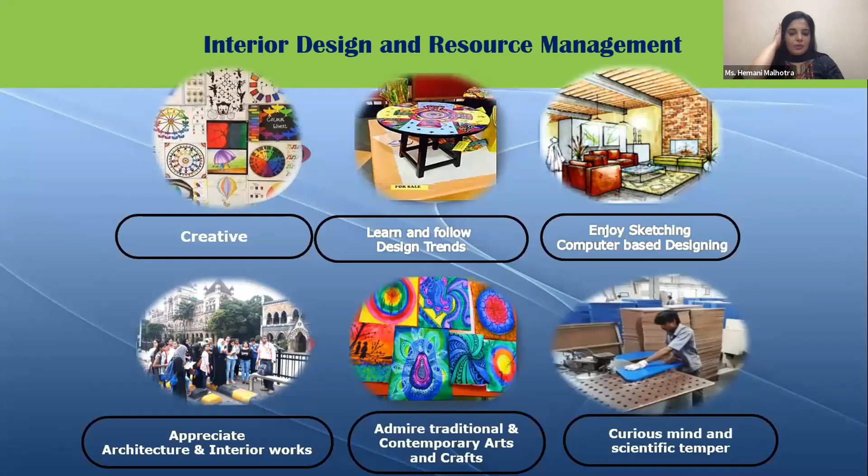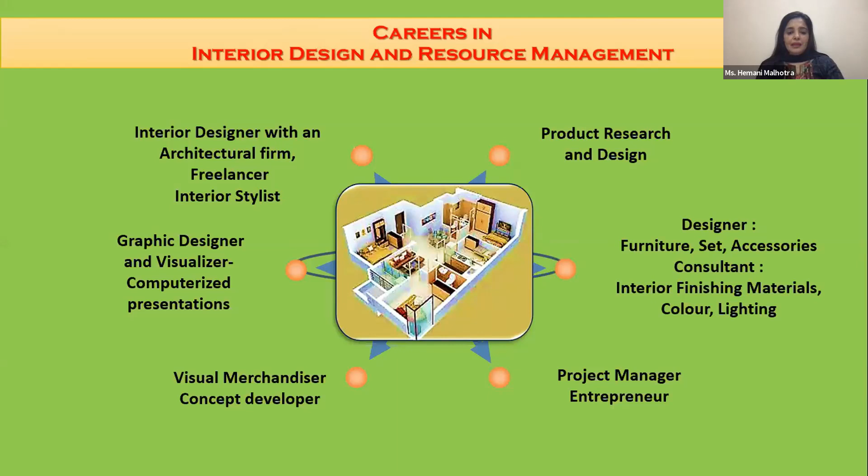The students of Interior Design and Resource Management learn to design a wide range of spaces and can explore a number of career paths, including freelancing and styling, set designing, accessory consultation, project manager, retail designing, graphic designing, and visual merchandising. The program has a dynamic approach as it drives the students to research and reinvent through varied perspectives to perform better. The annual exhibition Nirmiti is a popular event which showcases the creative work of our students.

The students have demonstrated skills for sustainability practices by converting some of the discarded pieces of furniture and material from college and other places into concept based products. The COVID 19 crisis demonstrates that we need global solutions to global challenges, and colleges and universities all around the globe have taken a step forward and have started collaborating.

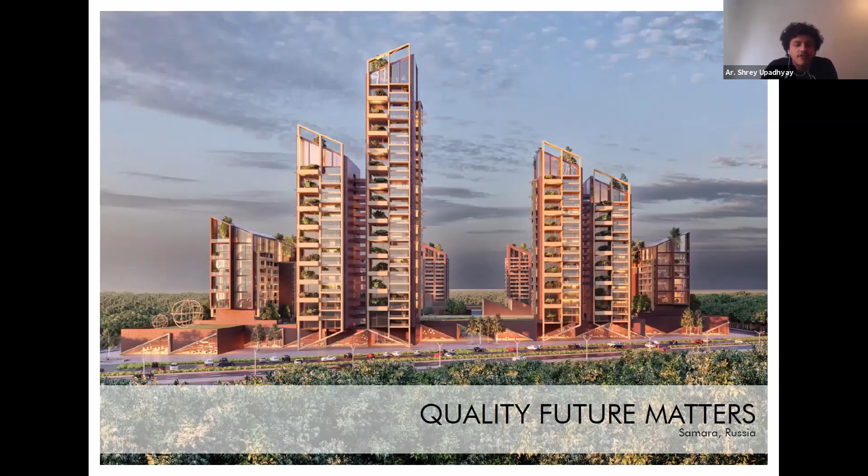So I would first start with one project that I just finished about three weeks back. It's a residential project we did in Samara, Russia. It's like a township. We were designing this huge township for 1,660 apartments, housing more or less 3,300 people. So this was the area.

Now, why I really wanted to highlight this project is because in India we really face this kind of situation day-to-day, when the city center is completely full and urbanized, completely built. For example, I'm from New Delhi, and around New Delhi the city is kind of full in terms of construction and people living there. So it's expanding every day.

It's expanding to Gurgaon, it's expanding towards Noida. Now the NCR has become New Delhi. So it's soon happening in all the major cities in India, like Bangalore, which is slowly evolving and growing. What I really need to say is that situations are changing, but the answer still lies in what we are searching for as responsible designers.

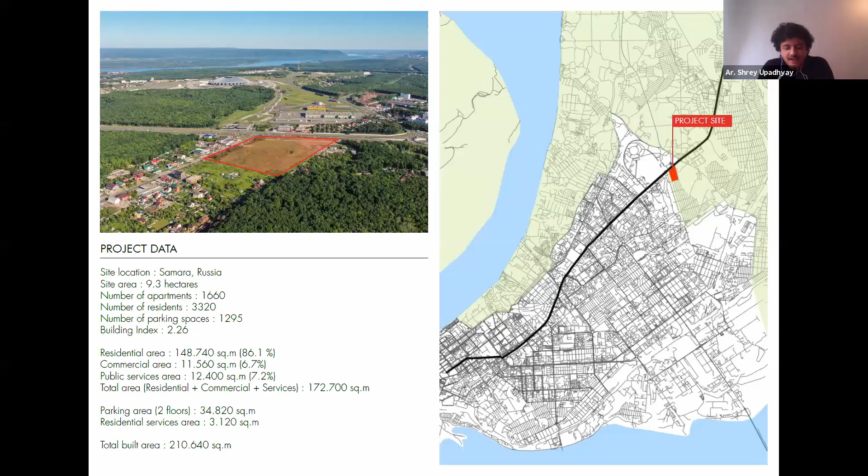Our idea started from a concept. What I mean by concept here is not that we decided the building should look a certain way because we took a particular concept. No, the idea behind the concept in designing this project was how to amalgamate, how to interact with what already exists. Firstly, it's a very sensitive kind of situation that we are working on in this project.

Apart from this, always respecting the vernacular architecture, the old architecture, the existing architecture of the place, our idea was to come up with an urban-rural model. The proposal was to combine two qualities: the intensity of urban life in the city, and the comfort of the countryside.

Why did we come to this concept? The main reason was the vernacular architecture of Russia. Plus, for us Indians who are culturally very driven by our architecture and design, it's very important to have a concept that is culturally driven.

In this project, our idea was driven by a dacha, a typology of Russian architecture with old wooden houses, where people have their own greens, their own place to cultivate gardens, hobbies, passions, plants, vegetables, and an old kind of living.

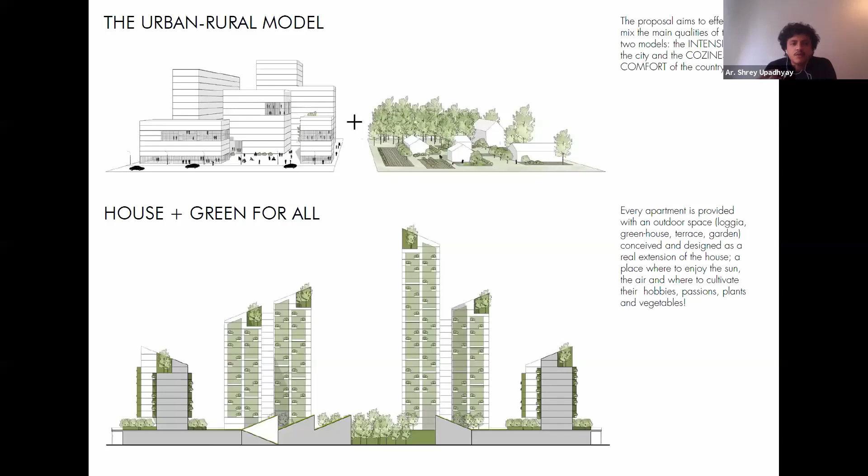That was the main concept. Slowly we evolved our scheme, and it became the court model we came up with, a very Italian idea of a courtyard. We as Indians also relate to it, because in Indian culture we have this very strong idea of courtyard.

I'm trying to always provide information we can all relate to, as Indians, and also because I'm working in Italy, where people have this idea of living in a courtyard. So we started with this court model, which guarantees protection, open spaces, insulation, and things like that.

Then we thought, let's come down to a functionalist approach too, because in Russia this functionalism is very important, rooted in their tradition. But we did not want a solution that was very Soviet, very regular. So we wanted to break it, which is what we started in the third point: building splitting.

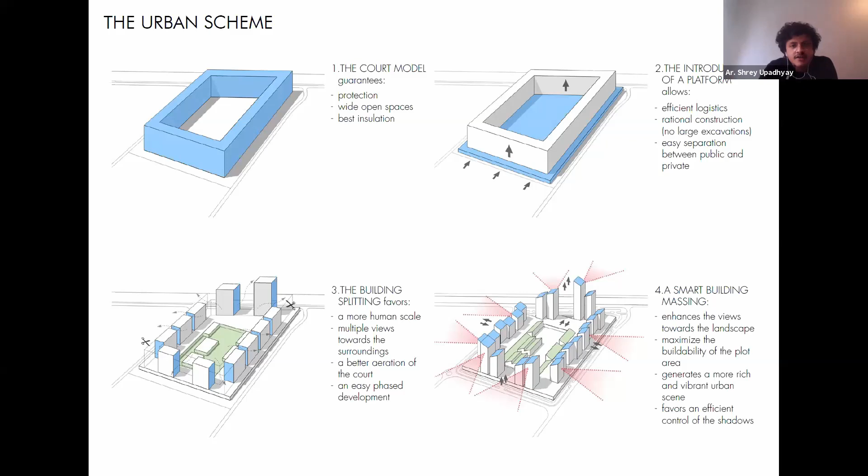Even this master plan is very flexible and modular. When doing the master plan, we worked on a module—which I'll discuss in the next couple of slides—an 8 by 8 meter grid. The space was very flexible and modular, but the idea was to create a dynamic living space.

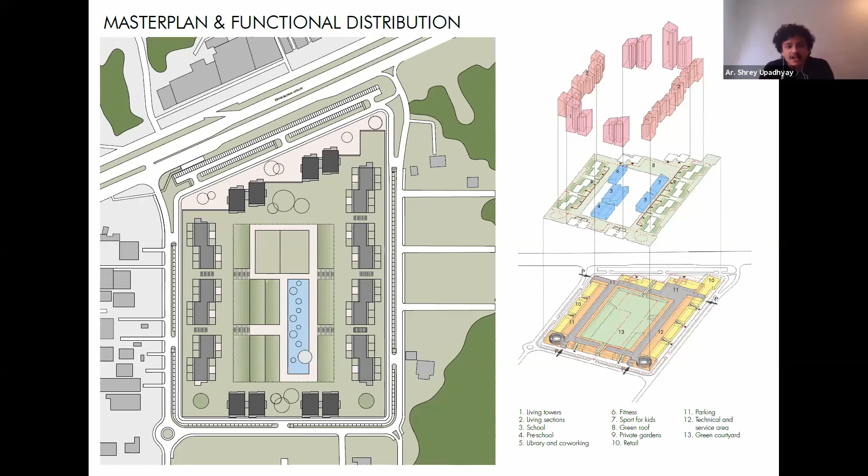That is how we arrived at this solution, which you see here. Yes, it's Russia, it's full of snow.

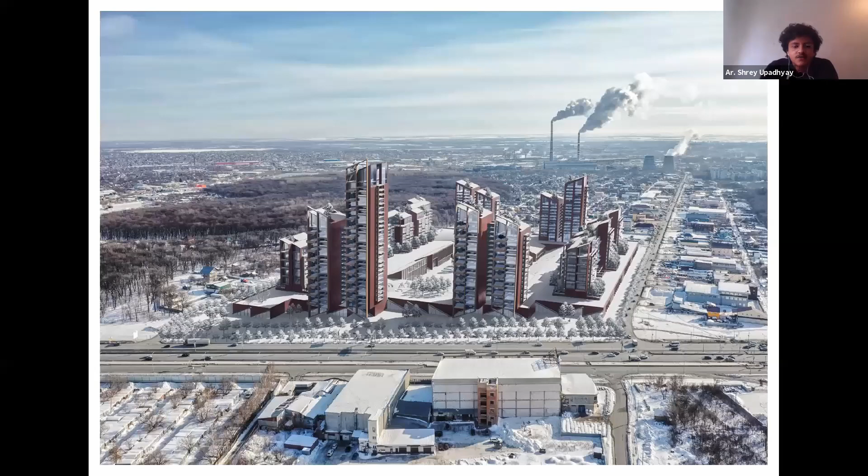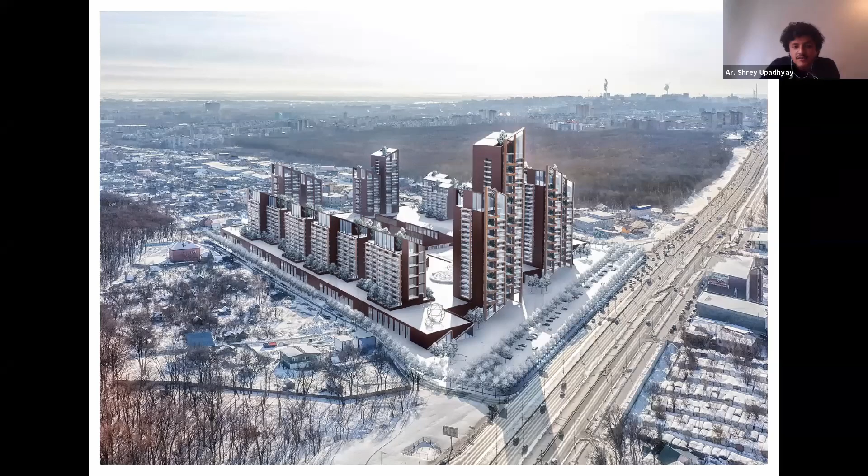Our context was very industrial, since the city center is up top but we are completely outside, in a very industrial sort of area. We still wanted to give people a different kind of environment, with flexible modular spaces. That's why all the housing units, whether facing the courtyard or the exterior, have been provided with a balcony, a loggia, or a terrace where they can cultivate their hobbies. Now we'll move into detail on how we provided them with flexible and modular spaces.

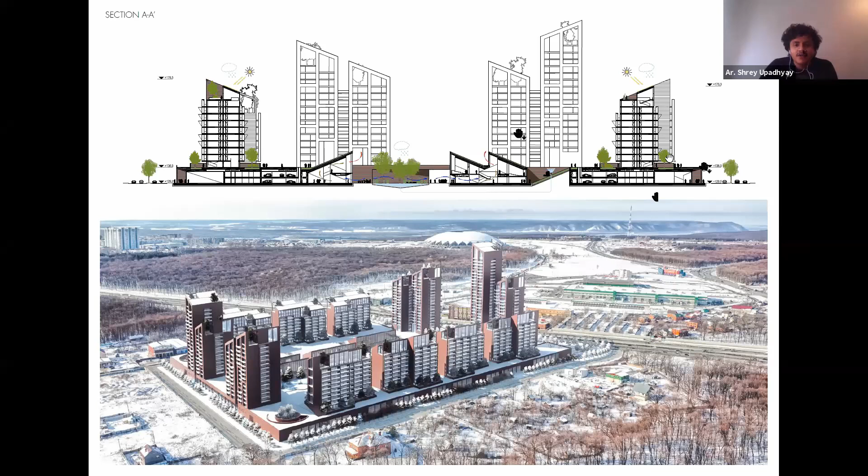The idea was not to just make the building come together and stand as a huge unit. We wanted a scheme that is very connected, not just with each other, but also with the other services we are going to provide. In the section you see here, the residential units are on the right and left, but in the center is the entire courtyard, which you'll see in the visualizations we're about to share.

So this is the front. Our idea was that all this flexibility and modularity, which you'll see later in the plans, is actually a very simple, fixed plan giving spaces to the people. But the outlook of what you're trying to achieve with this flexible and modular, simple spaces is still very vibrant and dynamic. That's the idea.

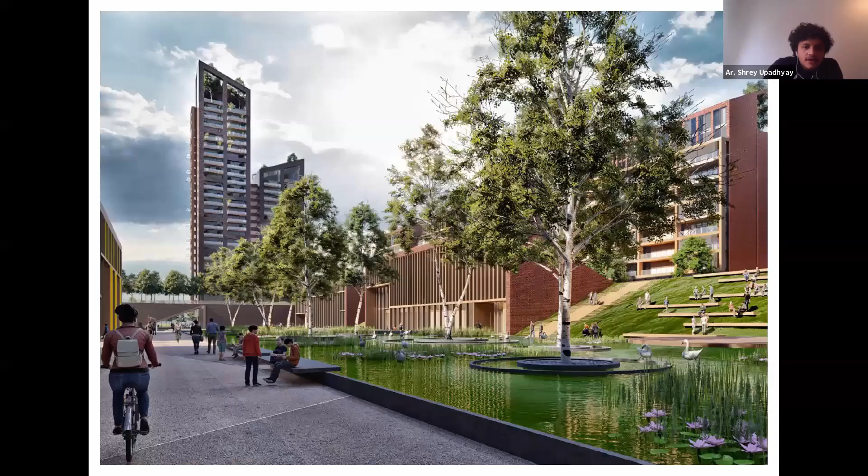Here is the inside space. If you see from outside to inside, it changes completely. That's what we wanted to give all the residents of the place - a different kind of environment. We wanted them to feel the intimacy, the comfort, and the coziness we mentioned before. Inside, we wanted to bring in that vernacular part of Russia, into the living spaces of the people.

But what are we offering to the people? The idea of flexible space - how you can configure the space. One kind of module can be configured into 6 different kinds of modules according to the needs of the people. This gives you the possibility to host different kinds of people in one building - young people, old people, or a mix. It's a very communal kind of feeling - the co-living concept promotes this kind of effect.

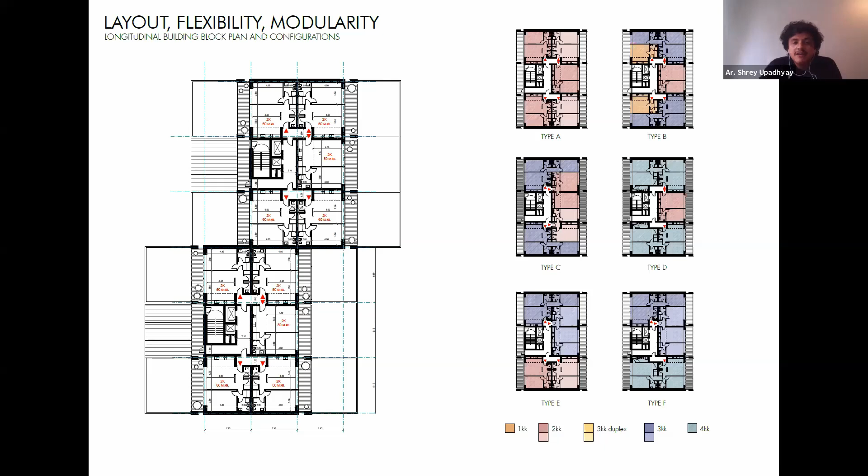With very small modifications, you can really achieve results which are baffling. These are the kind of spaces we were talking about, the flexibility.

We tried to make the loggia, the outside part, closed since it's Russia and winters are severe there. We wanted it as a prototype that can be opened and closed - open during summers, closed during winters - so it becomes an extension of the living space. Our loggia, our balcony, shouldn't just be a balcony outside, but should be a transparent space between the interior and the exterior.

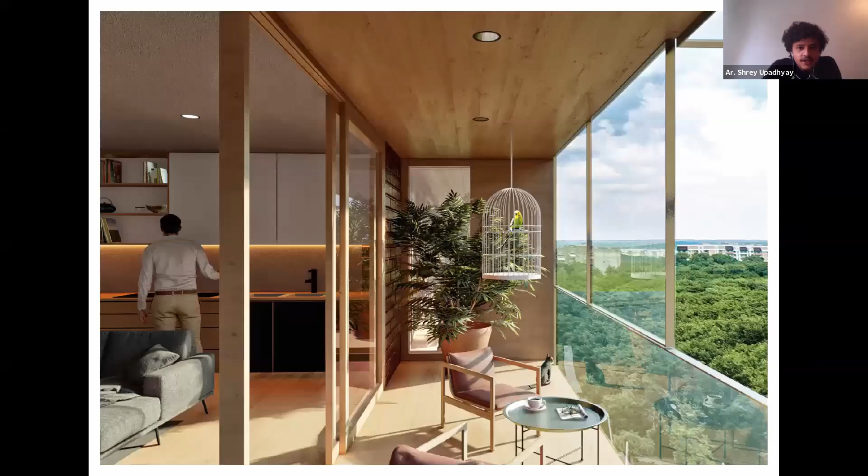We wanted to go with one module, type A, a basic module, which had the 2 BHKs, because the entire complex was related to low income and medium income groups. We still gave them a possibility. Our idea was chosen as one of the best because we gave them a possibility that from one type, a 2 BHK apartment, they can really make it a 3 BHK duplex, a 3 BHK, or a 4 BHK. So it is never a fixed kind of thing that you give to the user.

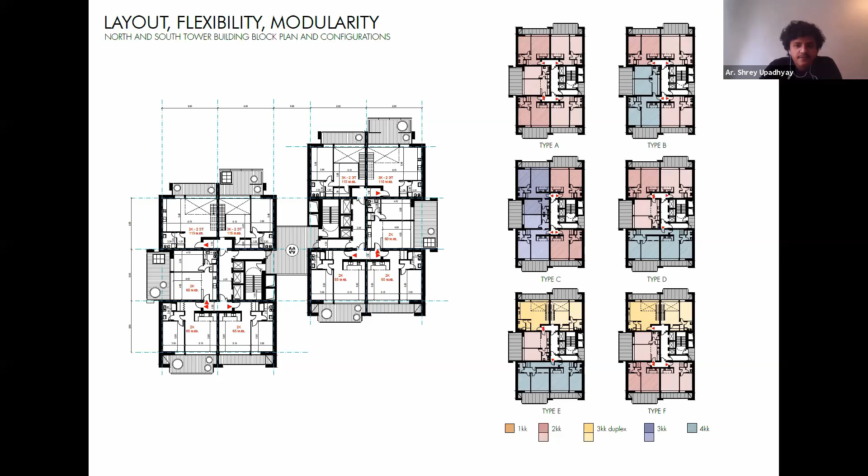So what it provides is flexibility, adaptation to new needs. This is one of the representations from the duplex apartment. This one is a bit more lavish, because we gave them an opportunity that you can provide this kind of apartment not just to lower or medium income groups, but also to higher income groups. So it can give real estate a very sustainable model, because at the end of the day it's one module repeated so many times, but still flexible. So what it gives you is different typologies, answering different needs.

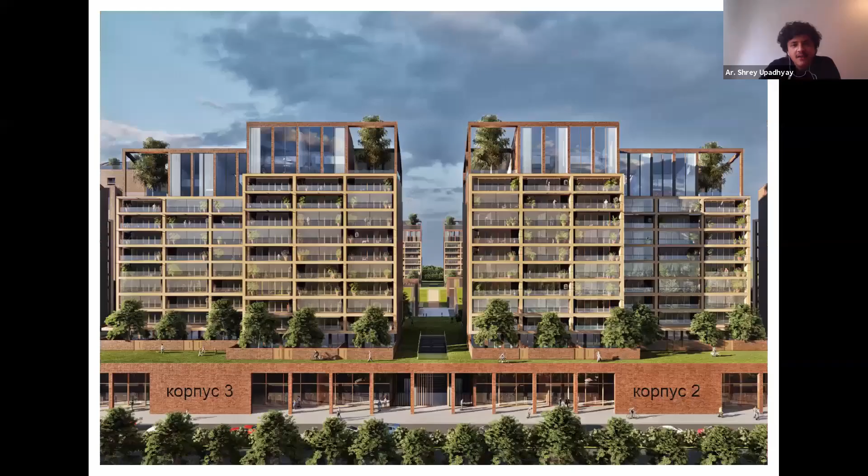So like I said before, you never know if the surroundings really grow tomorrow. For example, investors also have the possibility to change these apartments, to make them for higher income groups as well, so that people can co-live together. So this is how it shows our idea.

We provided people with vibrant spaces so that they can cultivate their hobbies, grow their plants, exercise outside. So it's not just targeting one kind of people or one kind of hobby. It's giving them the idea to evolve, to have flexible spaces.

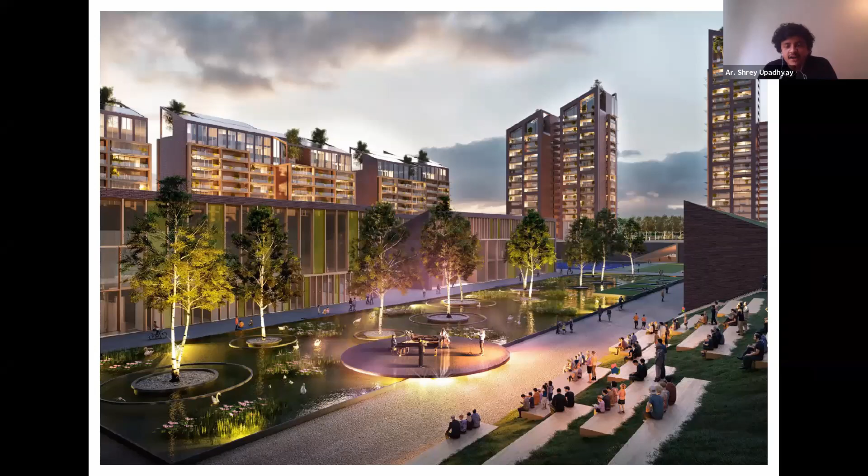This is a visualization showing how even the interior space is flexible, the courtyard is flexible. It is used during the day as a school, as a kindergarten and a senior secondary school. But then during the night, when everything is closed, you can use the same space. So our idea was that we don't need additional infrastructure; we can use what already exists.

So this also relates to the flexibility and modularity of the space, not just in the interior living spaces, but also in the spaces provided for people, how they can use the same space instead of creating newer infrastructure and wasting more resources of planet Earth, rather using what is there in terms of different functions. I would like to move on to the next project.

This one is a very conceptual project that we did in Czech Republic, in Prague. It was a highly conceptual proposal, not very well detailed, but the idea behind it remains the same: flexibility and modularity of the spaces, like I've been saying.

So our idea was building in coherence with this existing city fabric, which provides a protected environment, again with the concept of a courtyard like I said before. Our idea was to combine various lifestyles and living experiences, like suburban garden living, urban living, and dream living.

What I really want to stress upon is how one space should not just be serving a particular kind of function. It should be flexible enough to host different people, different functions, different needs. So even if you're designing a residential apartment scheme for a particular kind of group, always have this kind of possibility, a slight flexibility.

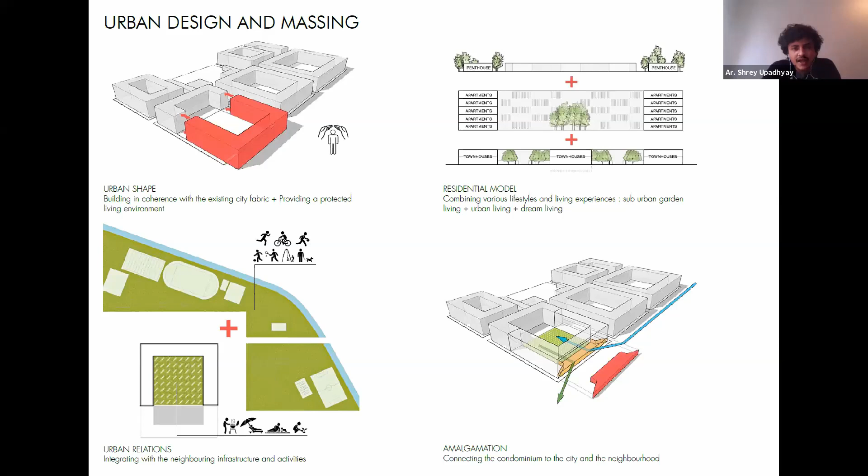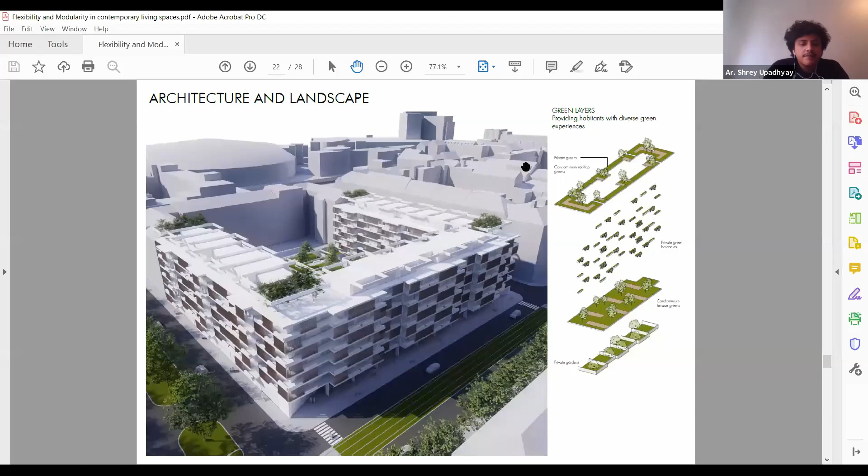It really helps us - it provides the people with flexible spaces. Now I will go ahead in detail with the plans. This was a very functionalist way of designing - you can say whether you like it or not, but the idea was to have this functionalist approach, yet a very flexible approach, keeping in mind always providing people with an exterior space where they can really go out, cultivate their hobbies, and live.

That is why we came with the idea of these green layers. We wanted to provide the inhabitants with diverse green experiences - private greens, condominium greens. So you can have a very protected environment but still have very different kinds of spaces.

If tomorrow you want to do something inside this complex with people, you can still have the condominium rooftop greens. It means you can use the infrastructure you're building to provide residents with spaces they can use inside, rather than exploiting what is there by creating new infrastructure. So your building, even the public space on the bottom - the idea of the public space was this.

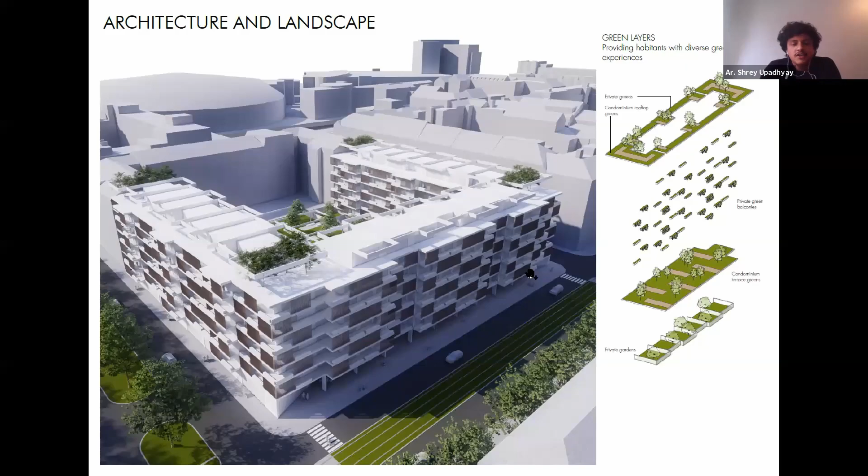The idea was to provide the people with spaces that they can use without creating additional infrastructure around, but rather providing infrastructure that they can use as multi-purpose space. We provided different types of private green balconies, condominium terrace greens, private gardens. Here in the plan, it's very visible.

What this flexibility and modularity of spaces gives us is this idea of phase development. What I mean is that all these different kinds of blocks can be made into phases. This gives the real estate perspective. It is very important to have this flexibility when it comes to phase development, because tomorrow this complete complex will not be built in one go. It will be built in phases.

What our flexible module gives us is that you can achieve this complete residential complex in a period of 5 to 10 years, something like this. But you will always have the possibility to connect all the different individual blocks with each other, in order to have a coherent scheme. So it is very important to design modular, flexible spaces, so that tomorrow it gives you the possibility of phase development, not just in terms of real estate, but also in terms of urban design, completing the block, coherent spaces.

Apart from this, flexibility and modularity gave us the idea to have a very open ground floor space, providing people with smart working spaces, lockers where they can do deliveries, private gardens on the ground floor, and spaces which can be used by people, like gym, hobby room - obviously always targeting the idea of COVID-19.

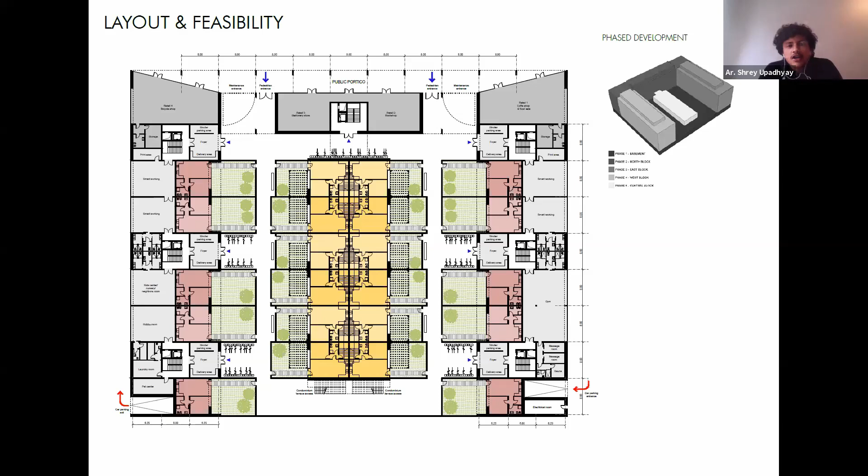What I mean to say is that these flexible and modular spaces really provide the opportunity to have sustainable spaces, to create this kind of sustainable model, which people can use and really enjoy. This is a typical floor plan. It gives you the same idea as in the Arena Park project, the other project in Russia. This is a completely different kind of project, but still the idea remains the same.

Our idea was to create these modules of 8 meters, giving people a basic layout that can be reconfigured to achieve different kinds of environments and spaces. Yet whatever apartment you make, whether it's a small 2BHK or 1BHK, you will always have an exterior space.

You will always have a space that you can use to extend your house outside, answering to the needs of the current pandemic. But not just today, because this is going to be the new normal - you will always need this kind of space. People are now always asking for smart working spaces, so our design always answers to these aspects.

For example, till yesterday we never thought we would be working from home, but now with this pandemic we really want spaces that are highly adaptable, flexible, and modular. You cannot create a fixed space, because tomorrow if you start working from home, you never know - even if you have a small apartment, nobody says you need 4 rooms in a house, but you still need to answer to these needs.

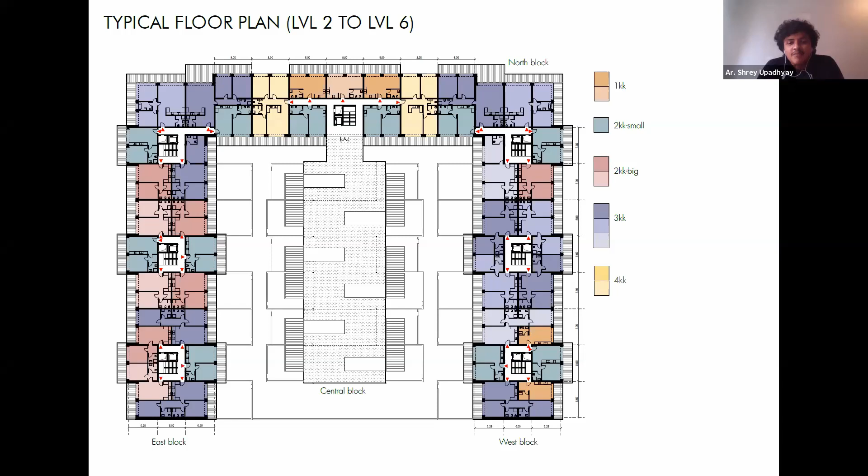I don't want to go into the details of how we started to modify, but the concept was this: we wanted to give people the possibility to change, to configure what they want, to answer what they want, not what we are giving them. We can give a basic solution, but with their needs, the solution should adapt to them, not the other way around.

Because they are the real users, we so many times get answers to our solutions by understanding the use of the space. When they start using the space, they come up with problems and tell us what they're facing. So if your design is very rigid and fixed, it can never accommodate the problems of the space.

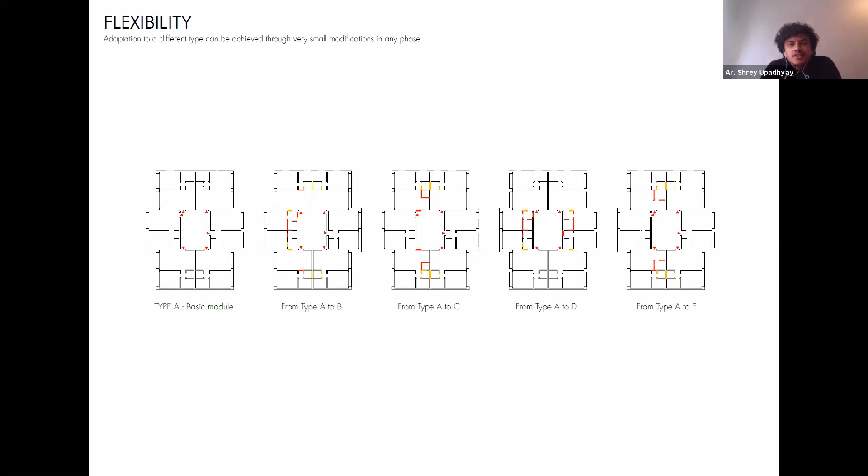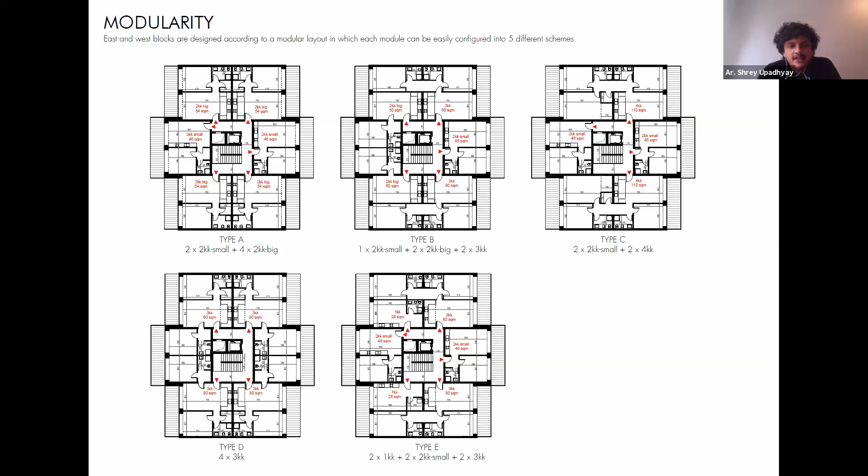These are the different technical aspects, the different types we could achieve. At the end, we came up with this co-living space, a social and lifestyle mix. This complex was a proposal that could host different types of people, from a young family to a newly retired person to a young couple. We always think if students live in a complex, old people or pet lovers can't live there, but that's not true - the idea of spaces is now very dynamic, and people want to live together in these spaces.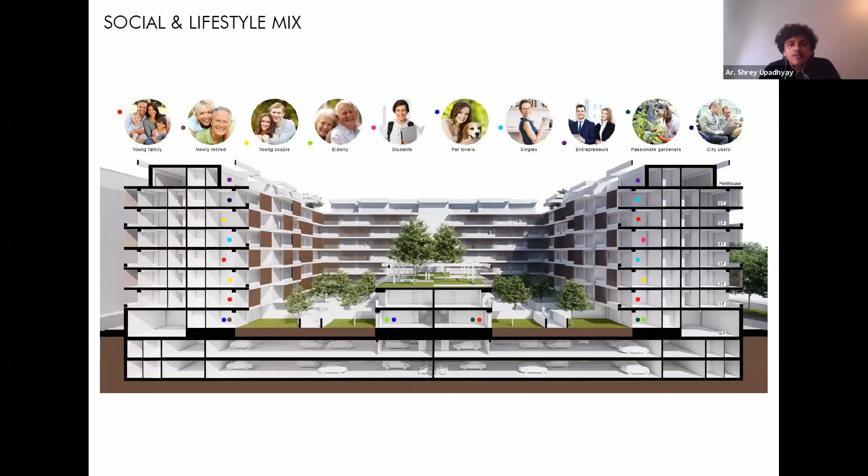So I would like to end this talk by saying that I would really appreciate if whatever I've shared is highly important and knowledgeable for you, if it proves useful in how you can use the concept of flexibility and modularity to achieve adaptable, highly adaptable spaces, products, and designs. So thank you so much. Thank you, everyone.

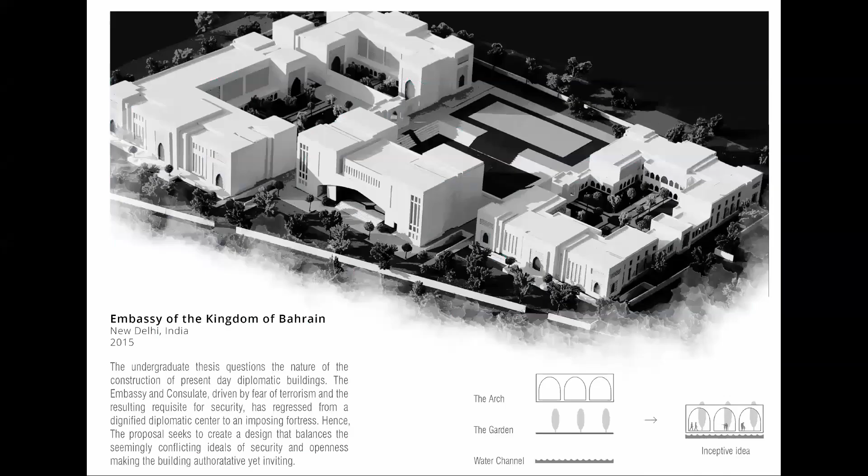I'll start with my bachelor's thesis, where I designed the Embassy of Bahrain in New Delhi, India. As we know, embassies are very high security zones. At that time I felt that because of these security reasons, the building typology had regressed from a diplomatic center to an imposing fortress.

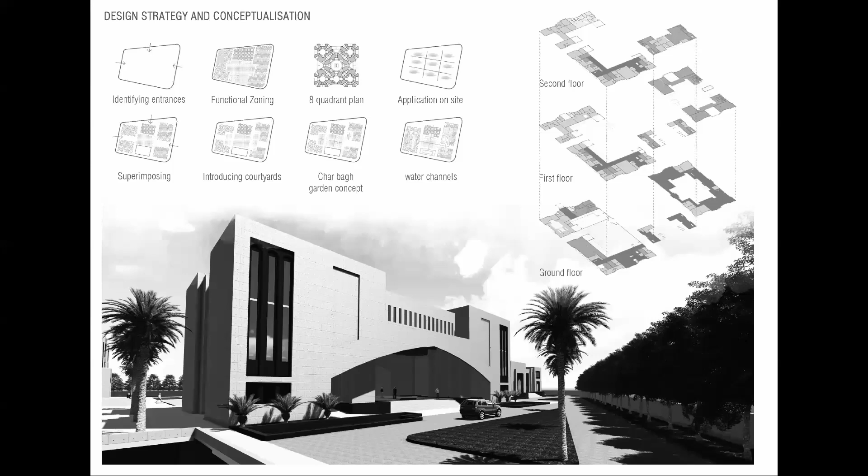I worked with a courtyard typology here, and I designed all the buildings and different functions placed in the embassy around these courtyards, so natural ventilation would keep the building appropriately warm and cool in the respective months. As you can see, this was the main entrance of the project, and above that you can see the concept diagrams showing how I created these courtyards and segmented the site to incorporate different functions.

I tried to reuse the rainwater and introduce water channels in the courtyard as well, which would help in evaporative cooling — again, a very simple and very cheap strategy. What we have to understand here is that as designers, there will be times when these strategies come in handy. You just have to think about it and apply them.

Now, for example, tomorrow you could be working for a client who wants you to design something as simple as a small terrace. Some people like a fancy bar, some like a small sitting area on their roof. Just think about these strategies — very easy, very quick ones. Make it green, have a small garden there. Instead of using expensive tiles that would be burning hot in the summer, use materials with very high solar reflectance to deflect most of the solar heat and light.

Try to add pergolas — that automatically shades your roof and is aesthetically pleasing as well. And try to make use of rainwater, which comes in handy in India. Trust me, the very moment you start exploring, you will start getting answers on how to make buildings, or even products, more green.

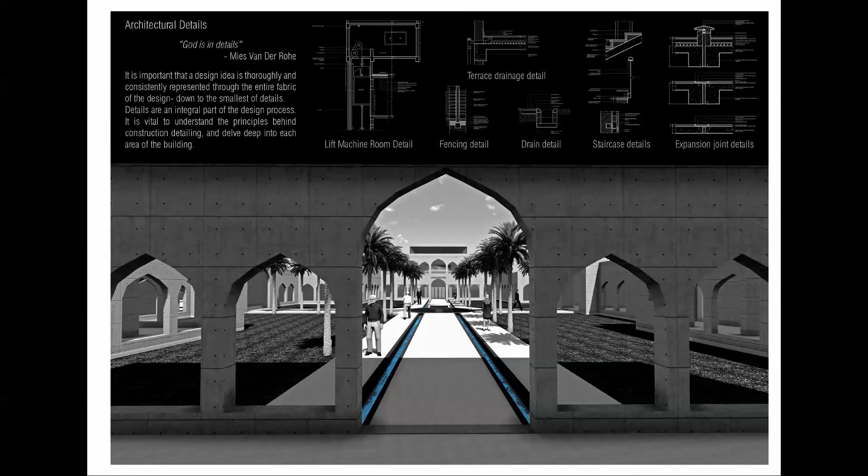So it was during this project, during my bachelor's thesis, that I realized my inclination towards sustainability. Shortly after, I moved to Italy to study sustainable architecture and landscape design. It was a two-year Master of Science program, and it helped me focus my interests on much larger scale projects.

I won't talk much about the whole experience of going abroad, because I know Sushma spoke about that a lot yesterday, and even Shrey mentioned his experiences. But at this point I'd like to say these were the best two years of my life — I learned so much, both about architecture and about myself. It was the first time I was living away from home, and it really helped me take control of things and make decisions more independently. I'm pretty sure the other speakers have mentioned this a lot already, so I won't go there.

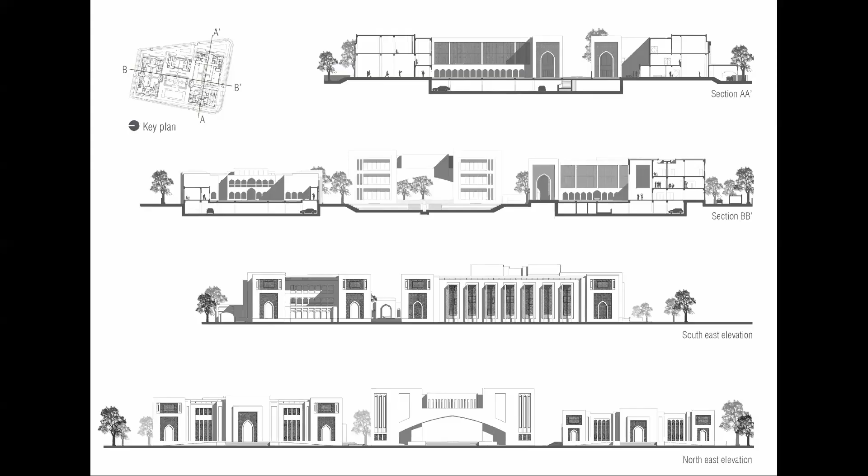So the second project I'll look at now in a little more detail would be my master's thesis, which was called Working with Wasteland. Once again, this project was based in New Delhi.

I don't know how many of you have been to New Delhi, or had the chance to enter it from the north coming down from Chandigarh. New Delhi has these massive landfills — mountains of waste, I would say. There are four of these, out of which three had reached their maximum capacity somewhere around the early 2000s or late 1990s. The shocking part is that they're still being used.

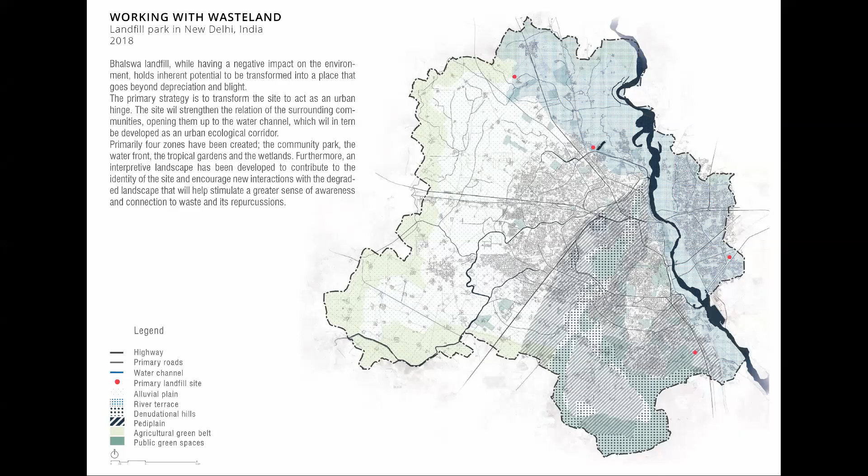So we focused on the Bhalswa landfill. This is somewhere to the north of Delhi, located right next to a water channel that flows down to the Yamuna. If you ever get a chance, search for this landfill on Google Earth and look at the water channel flowing right next to it — it's black, not blue, not dark blue, but black. That's the kind of pollution and toxicity flowing out of this landfill.

So we started with the urban analysis — studying mobility networks, water networks, green spaces, and population density to understand what we really wanted to do with the site. I believe no matter how small or big the project is, even if it's an interior design project or simply choosing materials, a detailed analysis is always important as it helps you make informed decisions.

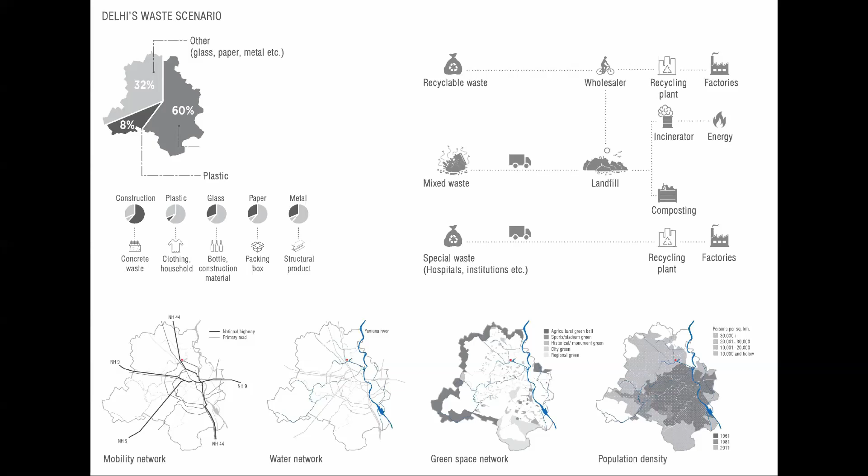So I won't go into too much detail here, but eventually a park typology was decided upon based on the location and context of the site.

So we studied the slopes quite in depth. The idea was to make use of the natural topography of the site. Now, I'm probably slightly incorrect saying natural topography, because it's totally artificially created. It's all waste. So I'd say the artificial topography of the site that's existing, and we wanted that topography to inform our design in general.

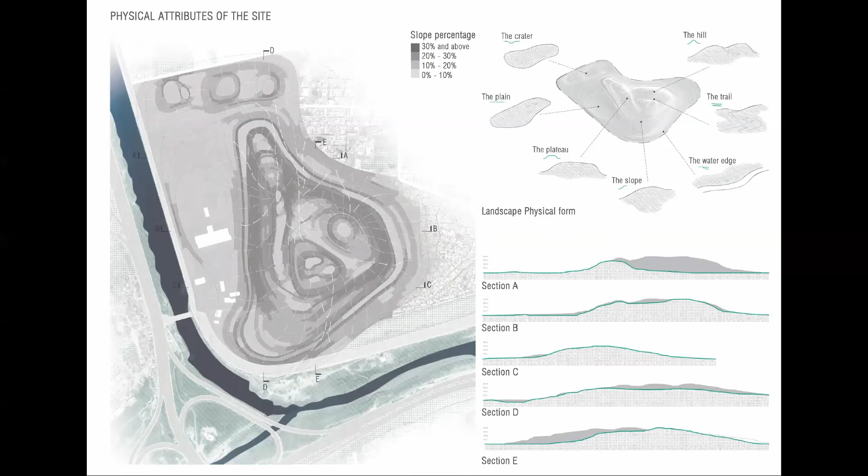Now, this was our proposal for the site. A park was an obvious choice, firstly because we wanted to reverse the changes, the toxic changes and damages that were done to the site, and plants are undoubtedly the best way to reverse that damage. I think it was more of a landscape project incorporating very little architecture, primarily looking at landscape strategies to mitigate these damages.

Now, the strategy that I'd focus on in this project is source reduction. The idea of source reduction is just to lessen the demand for new materials. So if you're making something new, how can you achieve that with the least amount of materials and effort possible, without creating demand for new materials? This is a universal strategy. It doesn't matter the site, the project, or the nature of work - it can be used everywhere.

For example, tomorrow if you're working on an interior design project, think about this: instead of ordering all new materials and furniture, think about using something from the demolition waste. Think about using local materials instead of purchasing expensive materials that come from 200 miles away. Look for manufacturers that offer products made out of recycled materials, and some even offer a buyback program, especially furniture manufacturers. You buy their furniture, use it, and at the end of its life cycle they'll buy it back from you, pay you a small amount, and reuse the wood in new furniture. Try to look for these strategies in every project you work on - interiors, landscape, urban design, architecture - because this idea of refurbishment and reuse, which eventually leads to reduction of new materials, is something we should really look at.

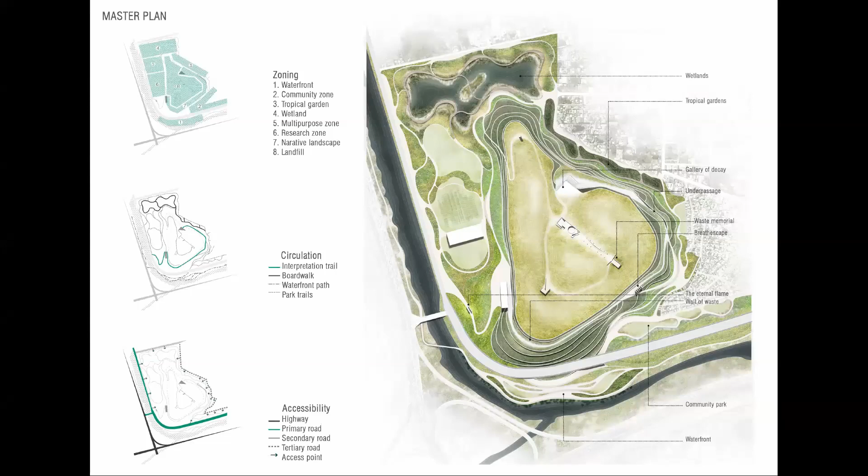Now in this project, whatever little architecture we did - you might see some small walls in the landscape on the diagrams at the bottom - we tried to make all of those from recycled materials. We did some research and realized there were companies that could produce walls or bricks out of waste. They would take this waste from the landfill, compress specific materials, and make them hard enough to act as walls or bricks. By doing this, we would naturally just use what was present on the site, reducing the demand for buying new bricks or using concrete for bearing walls.

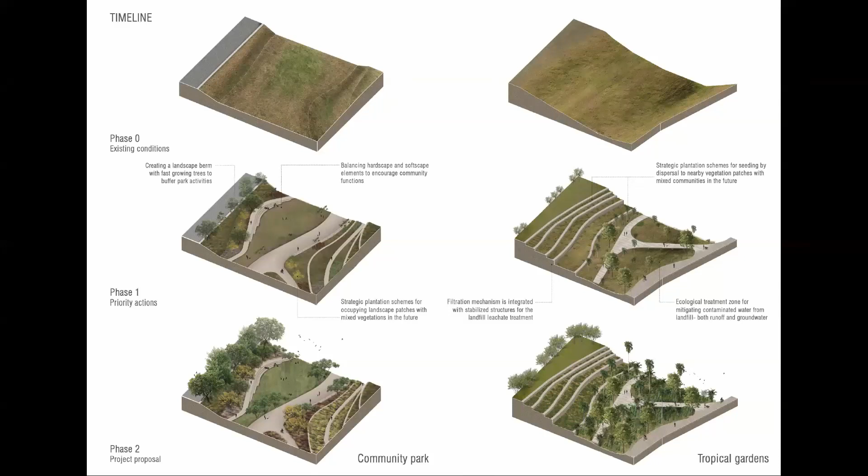Along with source reduction, another strategy we focused on was to use rainwater, to reduce the demand for drinking water or water that could be used for drinking, irrigation, or landscape purposes. Delhi, Mumbai, Calcutta, and a lot of other Indian cities experience heavy monsoons, so why not make use of it? We never realize it, but a huge amount of water required in buildings goes for irrigation purposes—imagine how much that would be in specific landscape projects.

On the left side is a point at the edge of the canal I mentioned earlier, that flows next to the landfill area. We wanted to develop it as a water edge—the idea was to clean the canal, remove the toxicity, and make it more enjoyable for people. On the right is the space I mentioned with the low point, where water would automatically collect, as the slope analysis showed us. This was the area where we would have wetlands and species incorporated into a landscape like this.

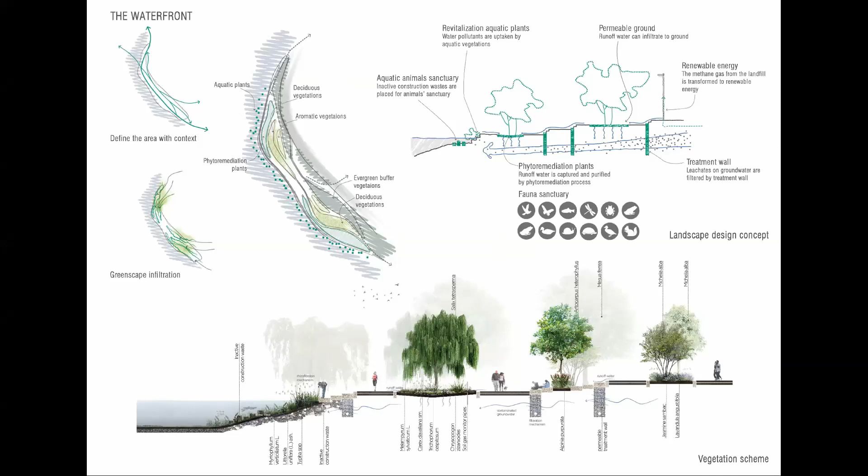While thinking about what to do with the site, we realized that no matter how much we remediate the top, we can never really erase what's below it. So the idea was that even if rainfall causes water to percolate down into the landfill, by the time it flows to the water channel, it shouldn't be so toxic. We installed filtration walls, shown in the section at the bottom, so that water passing through the landfill would be much cleaner by the time it reached the channel. Right at the edge, where we see plants and little steps before the water, we chose specific species capable of absorbing toxins from water, leading to a cleaner canal and water body right next to our site.

This was a graphical representation of what we imagined it to be. I know it's quite high hopes for water channels in Delhi, but we have to start somewhere. We have to start making the effort, start thinking about these things, because honestly it's already too late in some ways, but we have to start somewhere to achieve something in the coming years.

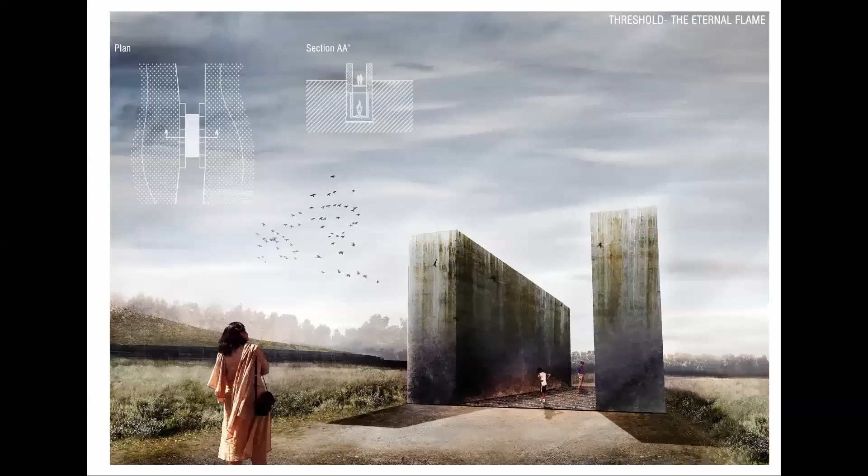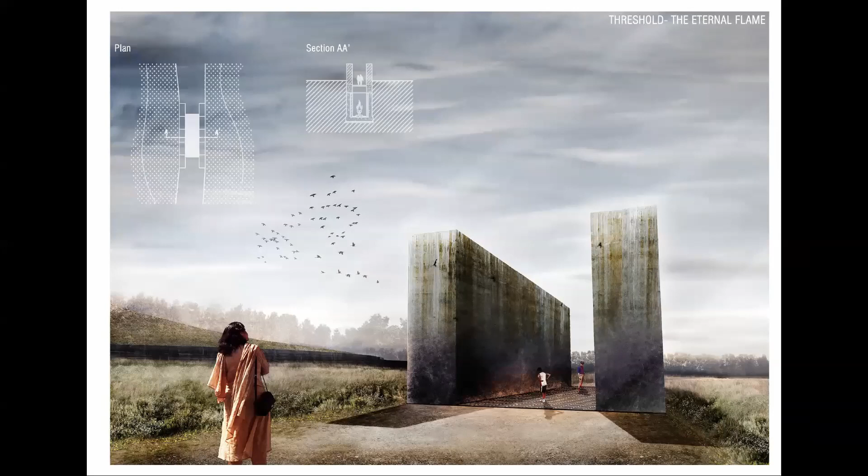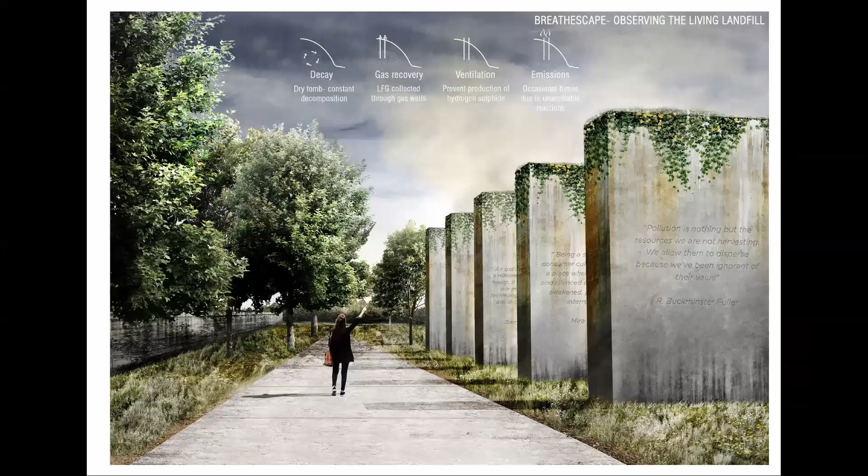In terms of architecture for this project, we did very minor interventions. It was primarily a landscape project, and the architecture was kept minimal and simple, placed only in very specific spaces for symbolic nature. The idea is that when you come to this park, it's not just a recreational space, but also a memorial—a memorial to waste. These small interventions were meant to remind the user that what they're enjoying, what they're walking on, this massive park in the city, is actually a landfill, and it became possible only because of our ill habits in the way we treat and manage garbage.

For example, here we see the space—if you look near the center, we kept the wall exposed in some areas. The idea was to show people that these walls are made out of waste. We wanted people to have a good time here, to enjoy the park as a beautiful recreational space, but at the same time we wanted these elements as part of the trails or landscape to remind you of the negativity of that site. It never goes away—it will always be there, no matter how much we try to remediate it.

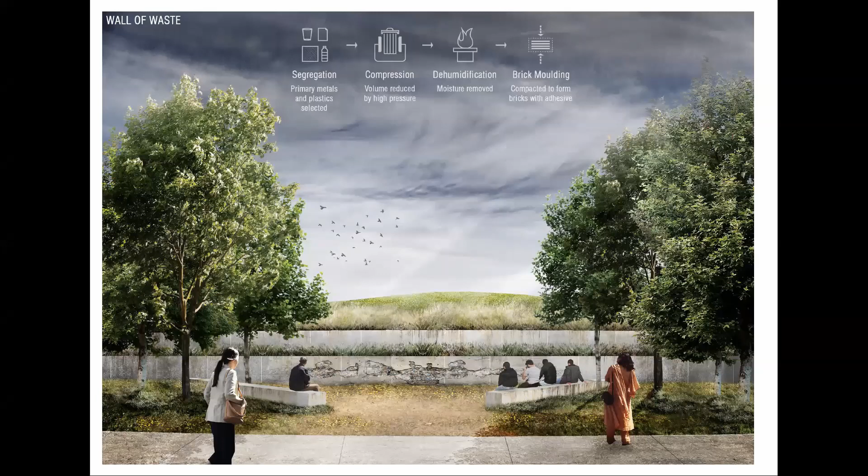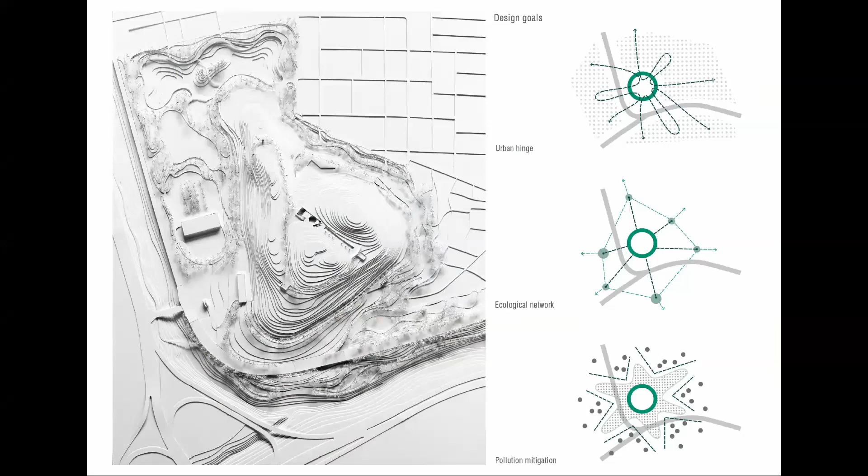After my master's, that was a physical model of the project we worked on. Then I started working at NEUF architect(e)s, where I'm still working, and I moved to Montreal. I started pursuing a Master's of Architecture in Urban Design and Housing at McGill University. It was a one-year program, more research-based with little studio work—we weren't doing a lot of designing, mostly research, and eventually had to work on an individual research report.

The idea behind choosing this master's was that after my two years in Italy, I had become interested in sustainability and projects on a much larger scale, almost touching the urban scale. I wasn't sure if I wanted to work immediately after, or pursue a PhD—I was somewhere in the middle. This one-year program offered the option that if I wanted to continue, I could pursue a PhD, or otherwise finish the master's in one year, complete my thesis and research report, and be done with it.

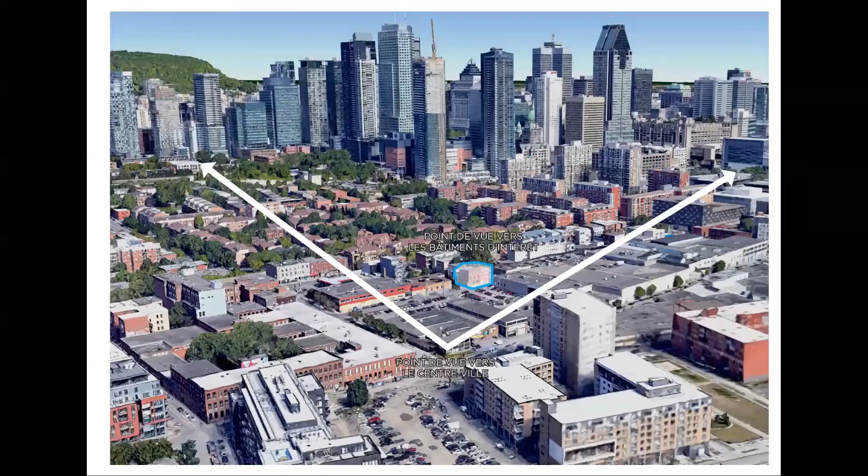So after my master's here at McGill, I started working at NEUF architect(e)s, where I'm still working. As part of my office work, I worked on a very interesting project located in downtown Montreal, at the intersection of the business district and the residential neighborhood.

The idea was to cater to both of these different contexts carefully. Downtown is seen as a business center, with high-rise buildings and industries, and this site was close to the water where there are a lot of factories. On one side, where you see a lot of trees, there were smaller residential buildings, 3 to 4 stories, an entirely residential neighborhood.

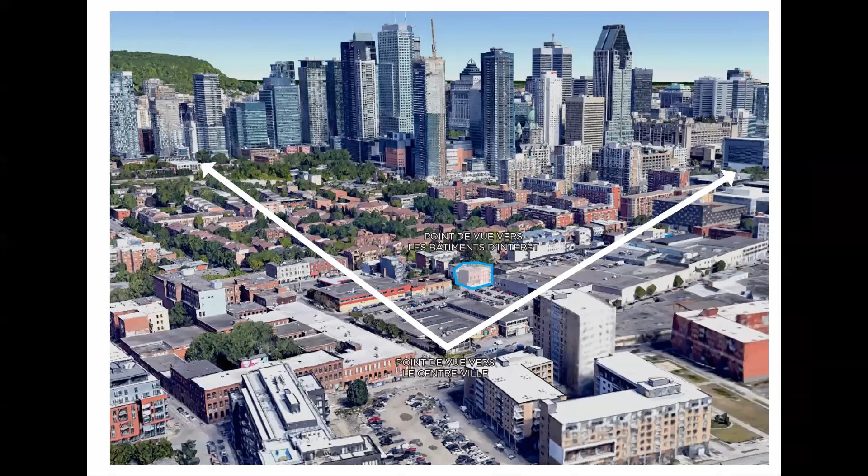So we wanted to site the project and arrange the program in a manner that would cater to both of these different kinds of populations and different kinds of needs.

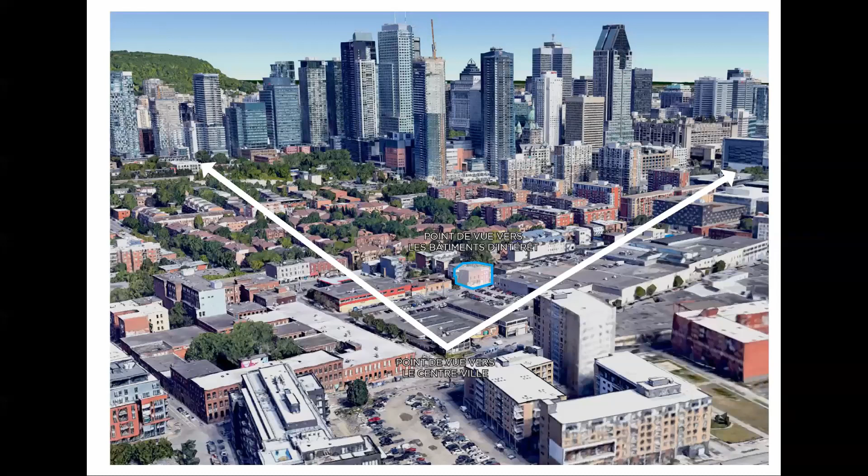The first idea was to keep the design as open and permeable as possible. People could walk through it; it was open and not barricaded at any point. It was more like an openness, like an open field to the landscape.

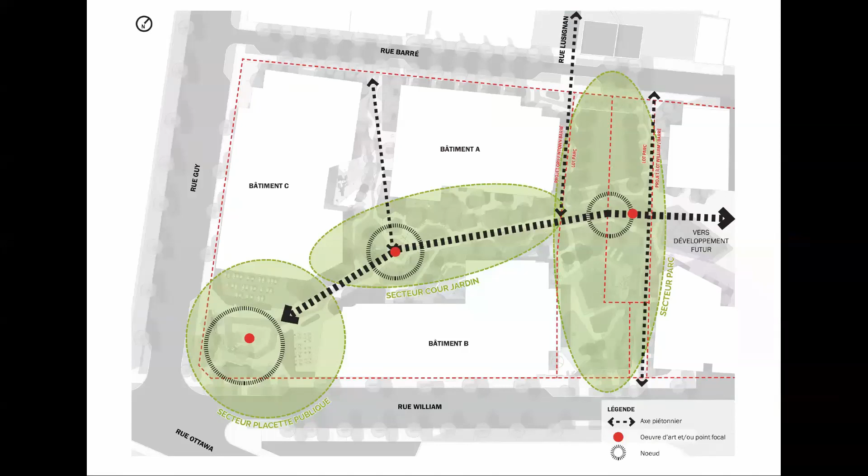The landscape was also carefully looked at to cater to the physically challenged. We worked with levels, since the site was sloping, and carefully modeled them so it was accessible throughout for the physically challenged, and also had bike paths going along with it.

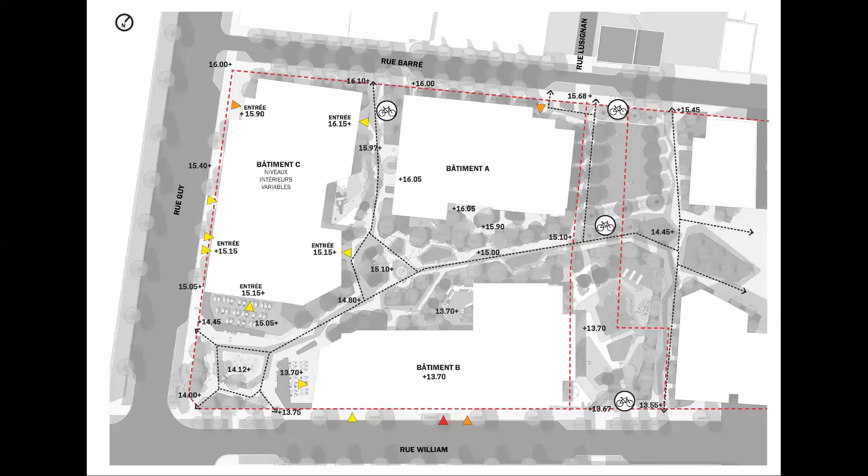We worked on 3 different buildings here, with the idea of a live, work, and play concept. This is similar to when Shrey talked about co-working and co-living spaces for different generations and types of people. The idea was to create a mix of programs, functions, and users that would allow people of very different backgrounds and requirements to live together, creating a dynamic mix in the project.

There were 3 buildings, meant to be done in 3 different phases. We were focusing on this one, which has the colored plans. All 3 buildings had commercial space on the ground floor. This building, the first phase, was entirely residential. The second building had 4 floors of school with residential on top. The third building had 5 floors of office space with residential on top.

So with these different programs, having an office space caters to a different set of people, and having a school caters to families, again a different set of people.

And then this building was meant to be just rental, so the top one wouldn't be selling apartments. It was just rental spaces. So again, this caters to a different type of people altogether.

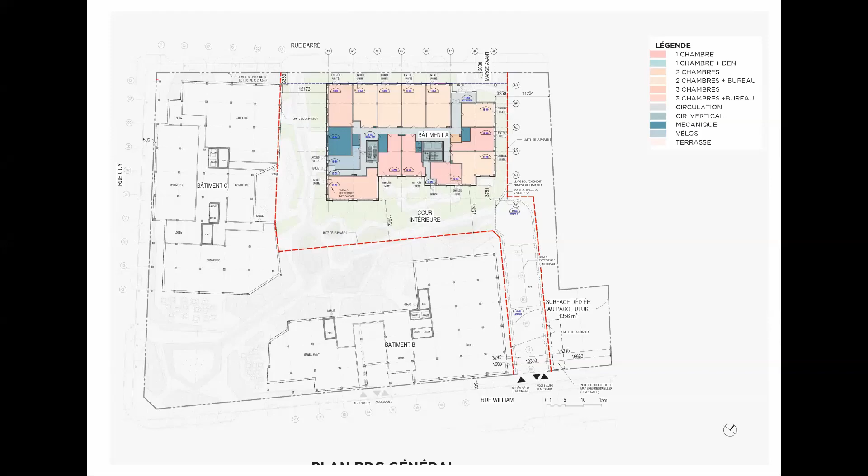So for these buildings we also worked on the ground floors. For example, in this one, where you see these areas with black metal, the idea was to have a commercial or office space at the bottom, and then have the house connected inside from it. So this gives you a much larger space.

This also gives a sort of modularity. You might not want to have it entirely commercial at the bottom, so you can have half commercial and keep half residential if you need more rooms. We tried to keep those ideas as part of our design, because we knew we were aiming for a very different mix of people with different requirements, and we wanted to cater to that flexibility.

The mixed use typology was developed to attract a variety of residents and in turn create a very dynamic mix of people. Again, very simple strategies we used here, but I personally really like this project because...

we had the option here of really exploiting the site in terms of sustainable strategies. It's primarily because - I know this question was raised in the presentation before mine - that sometimes sustainability and landscape take a backseat when we're working on projects.

So I would like to answer that if at times we see this, we should actually search for programs or get in touch with governments or municipalities, and sometimes you can actually get benefits in different ways.

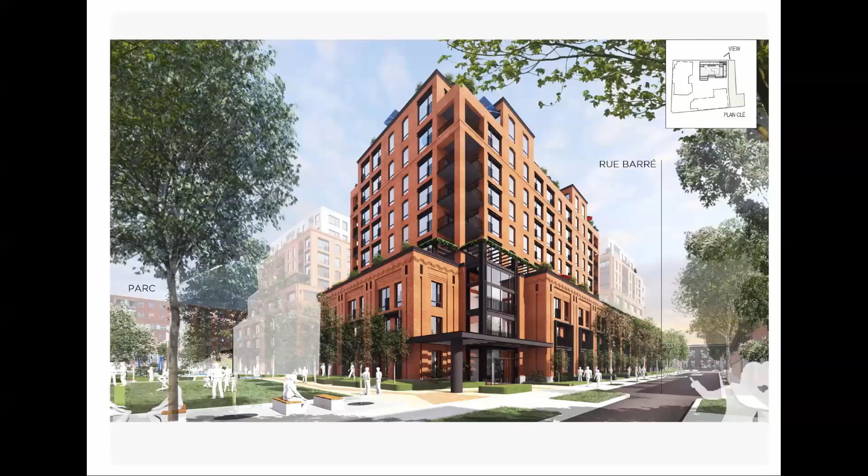We had green spaces on rooftops, so the heat island effect I talked about could be mitigated, because this way you don't have much hard surface that would reflect heat. We also provided personal food gardens for selective apartments.

Because as I told you, the idea was to cater to a different mix of people - sometimes we were thinking of families that would want their own small garden, sometimes of students who honestly might not care about growing their own stuff since they're only here for a semester. Some people might be interested, others might not.

So we could have a food garden for them on the roof, and if they want a space for it, they could apply to the building management, get themselves a space, and have their own small food garden.

Water reuse was also thought of as an important strategy here, and like I said, we tried to keep it mostly permeable so rainwater could be managed. Whatever water fell on the roof would be managed for irrigation purposes on site, because there's a lot of landscape, so you don't want to use potable water for irrigation.

At the same time, we carefully selected landscape species that would require a lot less water, but the idea was to account for whatever water they still require.

So a detailed construction and demolition waste management plan was also created for this project, because something that we don't realize as much is that in the landfills and in the waste generated by any country, construction and demolition waste accounts for most of that percentage. It has the largest percentage. And if you see at a site when demolition is happening or when construction is happening, most of the materials that we found can be reused.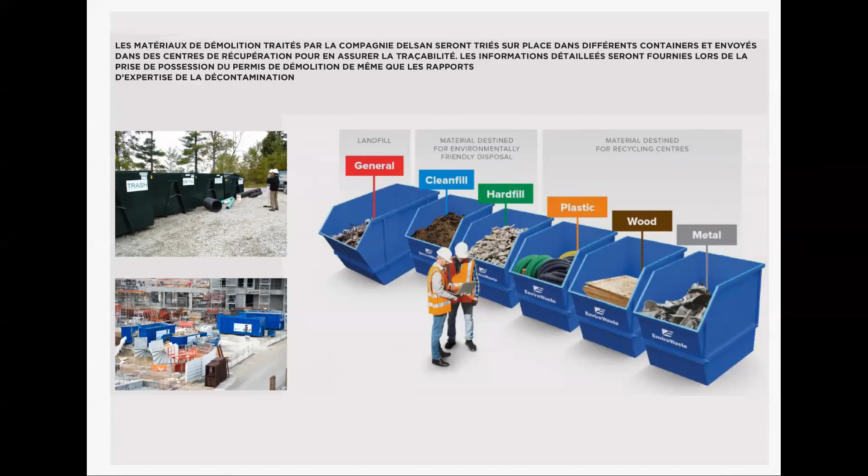They can easily be diverted from being sent to a landfill. And so that was the idea here. We wanted, at least our aim was, because there was already an existing building on the site, to use at least 75% to 80% of all the existing materials. And the same for during the construction. We tried to go for prefabrication and modularity, so that we don't really create a lot of waste on site while the construction is happening.

The project, again, we tried to have a gym, a pool, a grocery store, a common working space, and a playground as well for children. All these spaces were thought of so that people don't have to take out their vehicles. They don't have to travel a distance to go use these spaces.

And what was also thought about in this project, because we had an office and a school, was joint use of facilities. So for example, a school might already have a theater room, it might already have a small auditorium. Similarly, the office space might have conference rooms, and these spaces can actually be used by the residents in off hours. So automatically the need for these spaces within the surroundings goes down.

I mean, nobody wants to create a new theater when there's already an existing one. Nobody wants to think about an auditorium when it's right there. You just need to have the means of using it. So the idea of having the school and office was also that during off hours, some of these spaces could have a joint use function and could actually be used by the residents as well.

Now, along with that, in terms of the parking, because I just mentioned about the vehicle use, something we did here was we actually gave less parking than the number of units we gave here. So the idea was, because we realized that the site was closer to a metro station, closer to bike paths, and we were already providing a lot of functions right here, and the bus stop was right at the edge of the site.

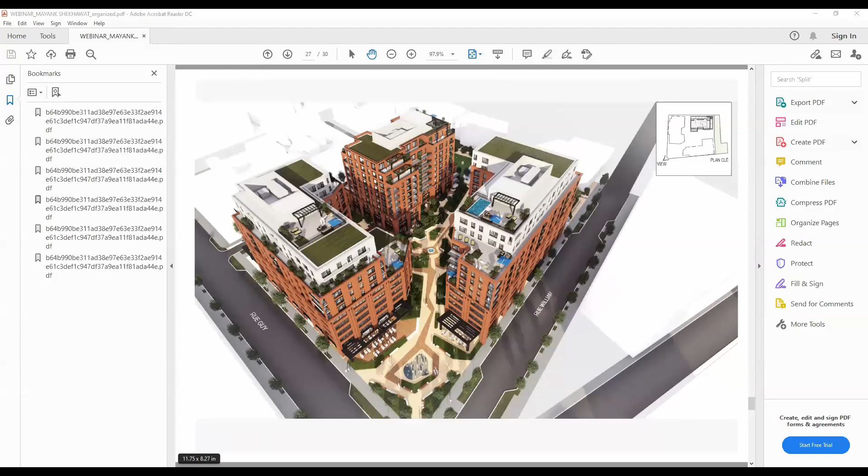I think we can actually make it more of a discussion after this, because I would really be glad to answer your questions, or have discussions about the idea of sustainability in architecture or in landscape as well, and if there's anything else I can help you with.

I have a lot of questions for you, Mayank. I'm just trying to turn on the video. Yes, okay, perfect.

Sharmishta here. Hi Sham. What you spoke about right now, where you're practicing, if you come up with a green design, do you get tax benefits for that? Something like that needs to be worked out in a country like India. Here it's more like your personal business whether you want to go green or not. And since you've done your LEED AP, how do you approach projects now?

Is it during the design process right from scratch, or do you address buildings that are already constructed and existing, and then make them green? That depends on the project, the site, and the client, because sometimes we work with projects where the building already exists and we have to refurbish it.

I know one of such projects that's coming up now for our offices. There's an existing commercial space, a 3-story commercial space, and there's supposed to be an addition of residential space on top of it. So we approach it like that. When I talk about sustainability, I talk about it in a variety of senses. For this particular project, we'll try to have heritage sustainability as well, conserving whatever is there on the site in terms of the building inside. In fact, we're also trying to conserve the interior walls, and just have the addition in a manner so that there's the least amount of disruption to what's already existing.